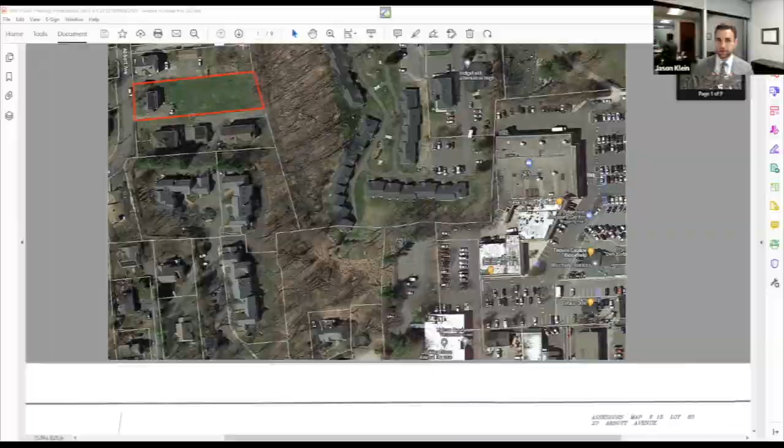So I'm going to stop sharing my screen now and turn things over to Brian.

Good evening. I will be brief tonight, as I said, because we do know that there will be a peer review of the project by not only the town, but interested parties did hire Steve Trinkaus, and we did receive comments through the town today. We got that this morning, so we're digesting it, and we will respond and likely issue an update to that response prior to the next hearing.

Again, just to introduce myself quickly, I'm Brian Carey, I'm the Director of Environmental Services with LandTech. We have offices in Westport, Connecticut. I am a professional wetland scientist and a certified state arborist with over 23 years of experience. Andy Salamides, who is also on the call tonight, is a professional engineer who's working with us to put together the site plans.

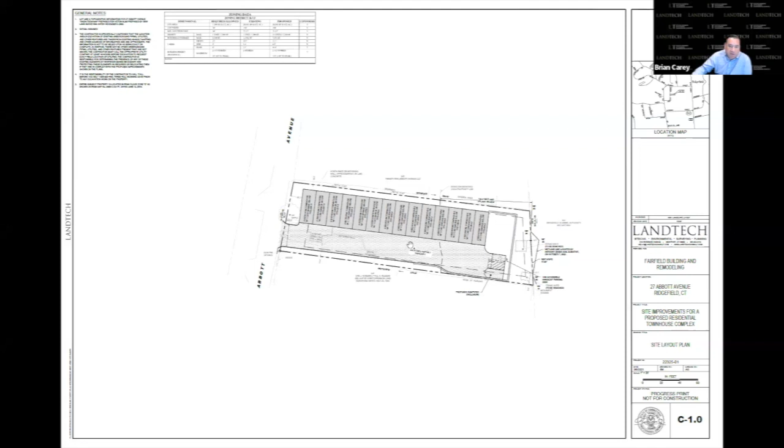This is, as Attorney Klein stated, a proposal for... I'm going to just share my screen real quick if that is okay. Can you see the site plan okay? Can you enlarge it? Let me hold on one second, I was trying to do that.

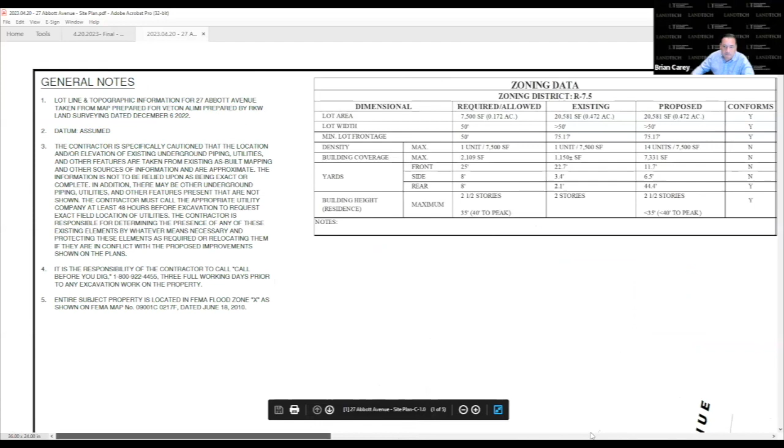Is that okay? Yeah, now you can just center it. That's great. Yeah, thank you.

So the proposal, the property is at 27 Abbott Avenue in Ridgefield. The site is currently 0.47 acres, just under half an acre. It's currently developed with a single residential house that was constructed in 1951.

There was a previously approved application through zoning and wetlands in 2011 for the construction of 3 condominium-type buildings on the rear of the property, which included leaving the existing residential house. I believe that permit is still valid, or is just on the fringe of expiring.

The applicant, who is our client, is proposing to construct the building as shown, which is 14 individual townhouse-style units. It's a 2 1/2-story residential building. The first floor will be garages with a walk-up.

The property slopes pretty gently from west to east. The regulated area on the property is actually just directly off the property. There's a fringe area of wetland that's right on the property boundary, as flagged by our soil scientist, Anthony Zemba, who will be in attendance at future meetings.

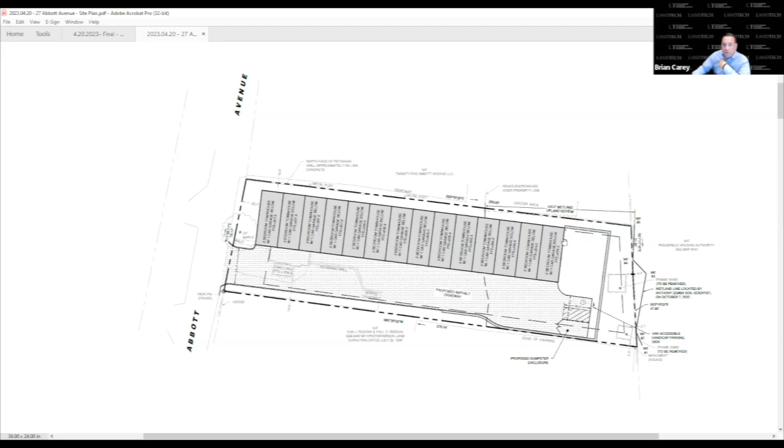We've maintained a pretty substantial buffer to the wetlands. There's a wall that's going in here, but that will all be planted based on the planting plan that we have submitted into the record.

There are no permanent or direct impacts to wetlands. All of the work being proposed as part of this project is taking place within the upland review area, so there's no direct impact to wetlands associated with the project.

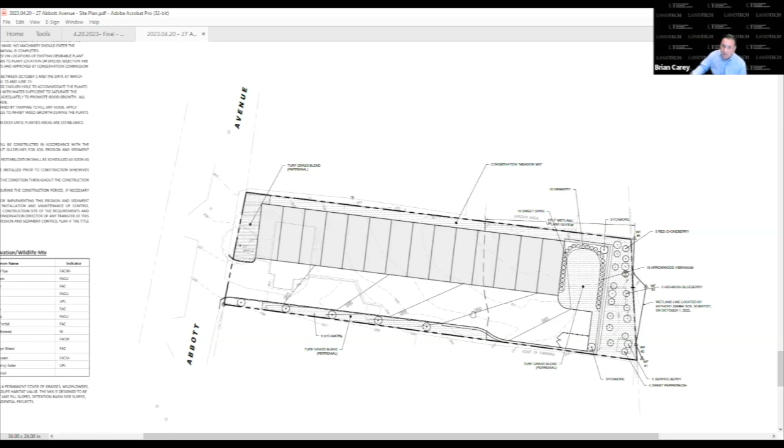We have a pretty substantial erosion and sediment control plan that has been submitted as part of our plans. We did go out there and flag the wetlands as part of this application. That soil report is in the record. Again, there are no wetlands on the property.

There is a small stream course located on town of Ridgefield land, on the housing authority land, just directly off of the property. The site is currently developed, as I said, with a single residential house. The back part of the property is all lawn. There's not much landscape feature to the site itself.

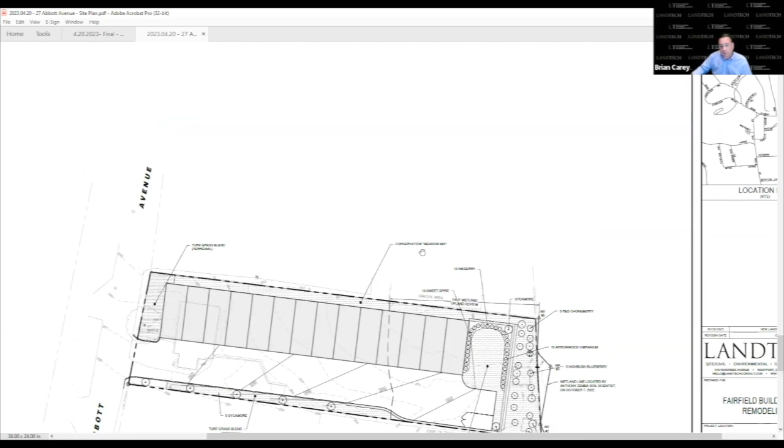As far as best management practices, we are complying with the town of Ridgefield stormwater guidance. The idea is to capture all of the roof runoff and driveway runoff into a Cultec system, and then discharge it via level spreader into what will be a planted buffer adjacent to the wetlands.

Go through this real quick. All of the site is currently serviced and will be serviced with municipal water and sewer. There's no potable well or septic associated with our proposal.

We did submit a wetlands functions and values report as part of our documentation and as part of the record. Basically, the primary functions of the wetlands were determined to be sediment, toxicant, and pathogen retention and nutrient removal, and to a lesser part, flood attenuation, production export, and wildlife habitat.

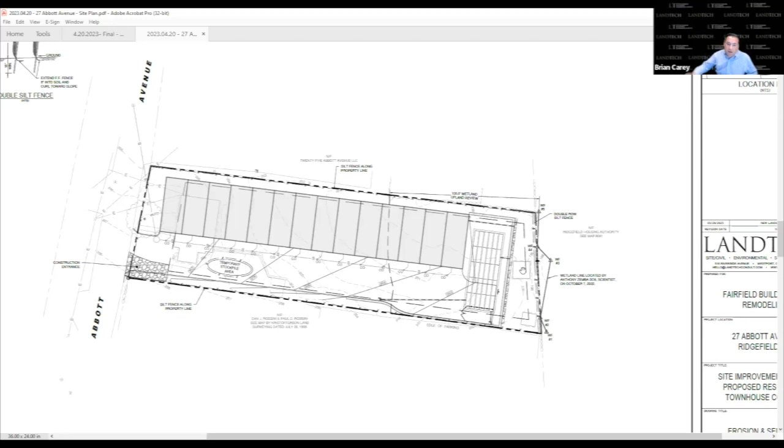Since there are really no impacts to wetlands and we're staying in the upland review area, we do have a planting plan that we put together within the buffer area that we feel is substantial to mitigate any of the impacts within the upland review area.

Associated with our project, again, I was going to keep this short just because of the time frame tonight. We do anticipate getting, like I said, peer review from not only the town, but we do have Steve Trinkaus's memo. We are going to address all of that.

I spoke with Caleb this morning. We will have a response to that within the next week regarding the Trinkaus memo, and then as soon as possible, once we get the third-party review from the staff.

I can answer any questions about the application, but I will be ready to give a more detailed presentation at the next meeting.

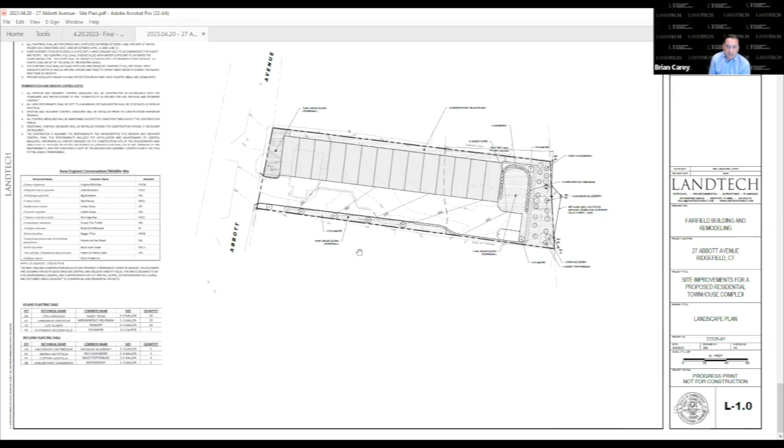Thank you. Any comments from the board at this point? I see Tracy's hand. Okay, Tracy?

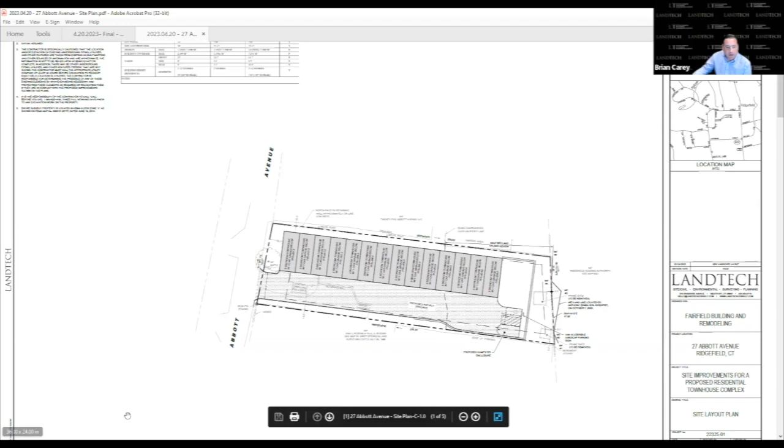Just a quick question. Does your proposal preserve pre-development site hydrology during a 50-year storm? Yes, that is in our water quality report, our drainage manual.

We can have Andy Soumelidis, who's the project engineer, I will have that answer for you at the next meeting. He is on the line right now. That's more of his question that's germane to him. Okay.

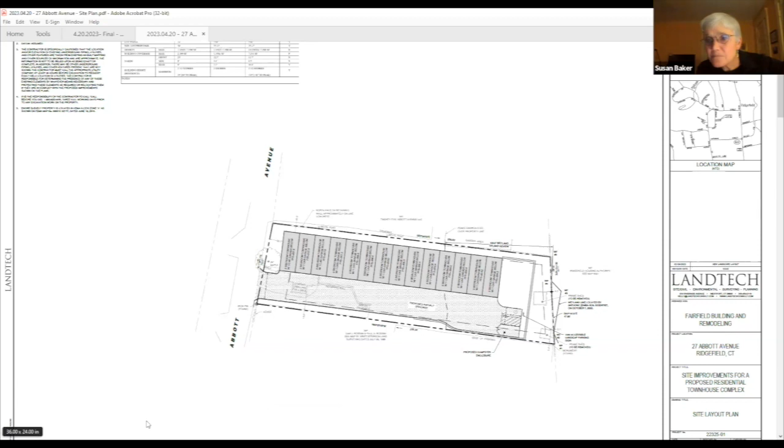Anything else, Tracy? Well, and I guess what is the impervious surface calculation of the proposed plan?

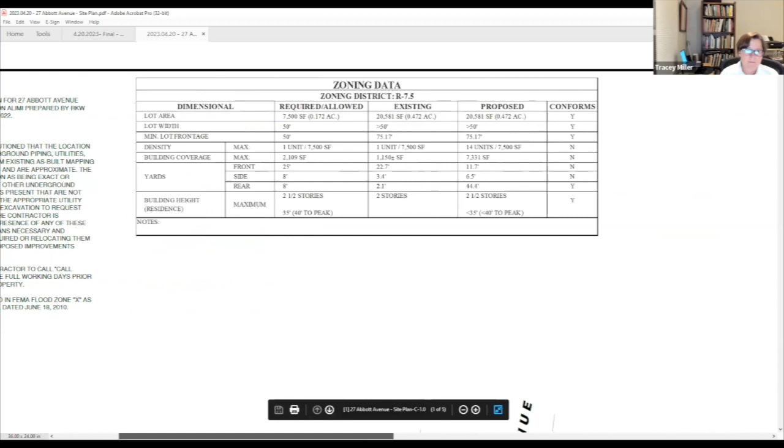I'll have to get that for you. Let me just... thank you.

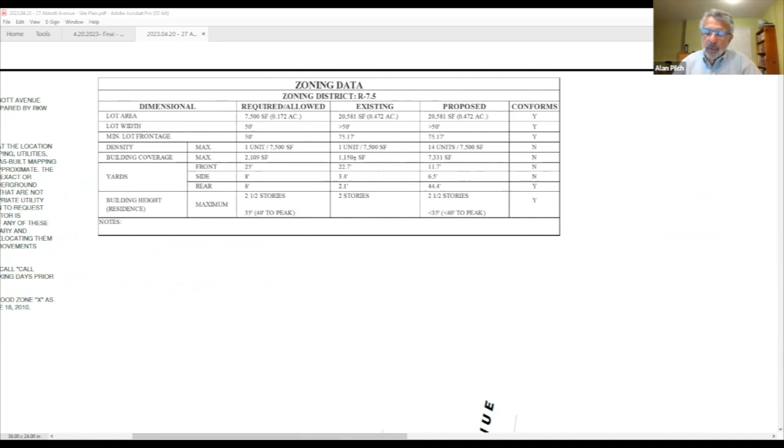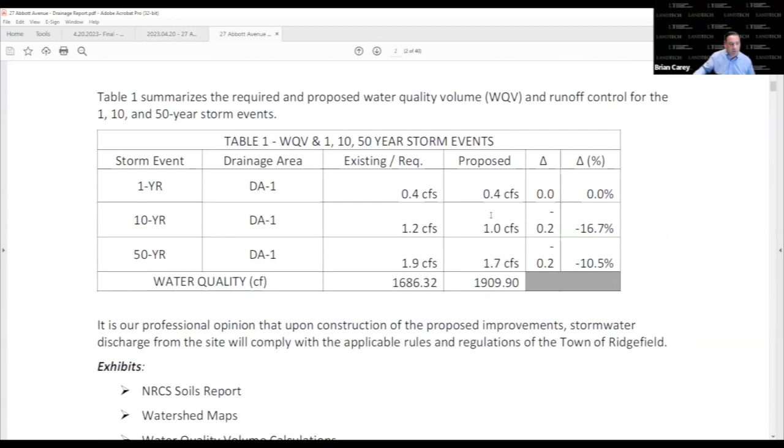Yes, thank you. I just want to first point out, Mr. Carey, that you stated during your brief presentation that roof runoff would go into the subsurface chambers. No, it's going into the level spreader. Correct, it's not modeled that way at all. I just want to point that out. Yes, correct. And I'll just say that I see, in reviewing these plans as well.

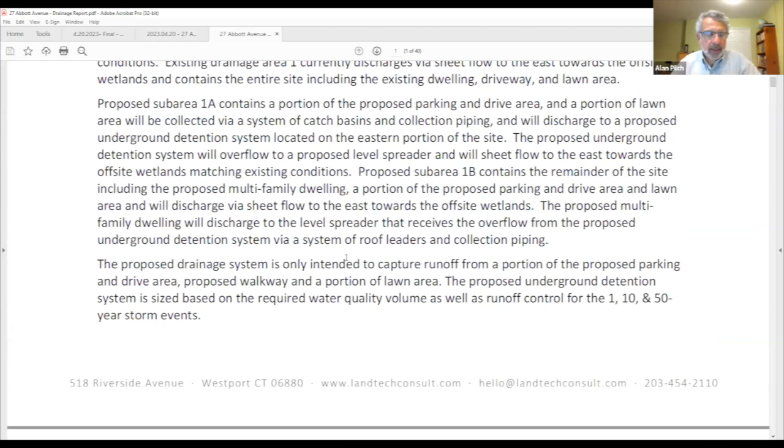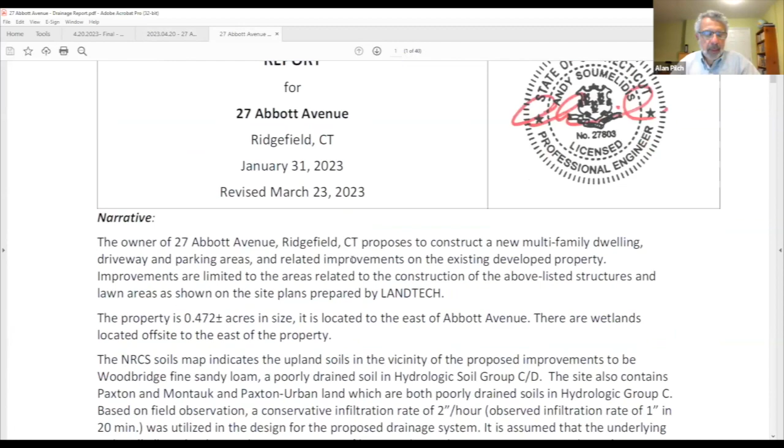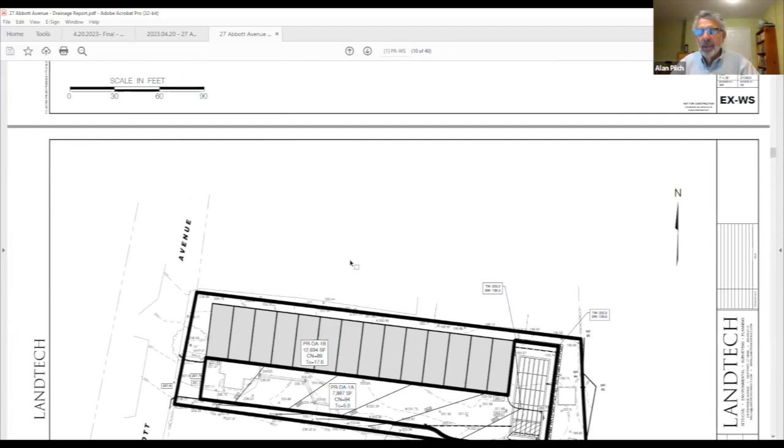I saw that the project narrative presented three alternatives: the no-build alternative, a second larger-build alternative with a larger building, and the third was the current design. But I'll say that this member of the Inland Wetlands Board would certainly like to see an alternative that has no construction, no impervious surfaces within the upland review area. I think that's an alternative that is both prudent and feasible, and I think it is something that should be presented to this board for its consideration.

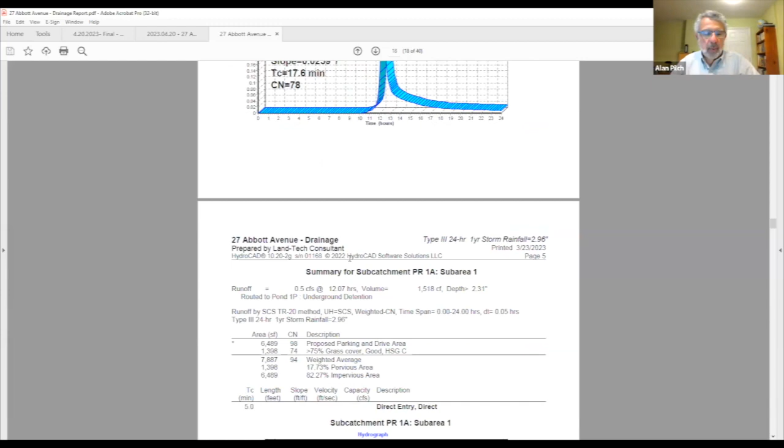I did have the opportunity to review the drainage report, and I'll just say that I am a civil engineer who does a lot of stormwater work. I'm also a landscape architect. One of the concerns I have with the adjacent wetland is that the stormwater management plan as designed will result in flooding and sedimentation into the wetland.

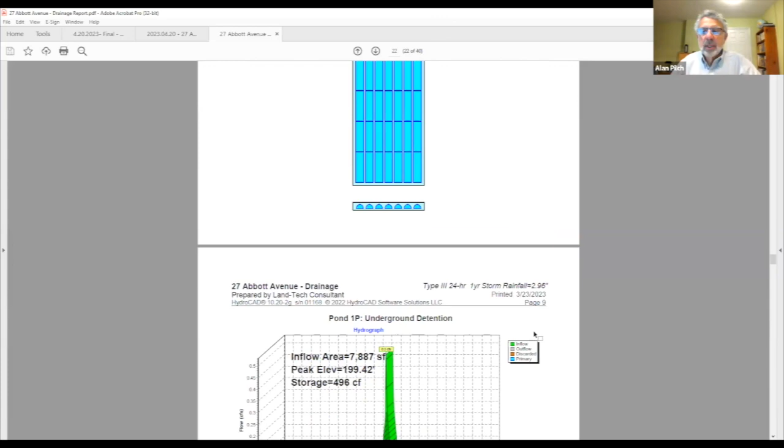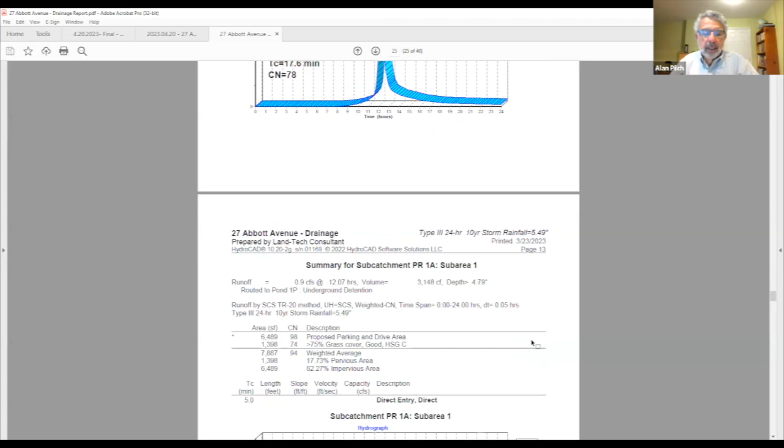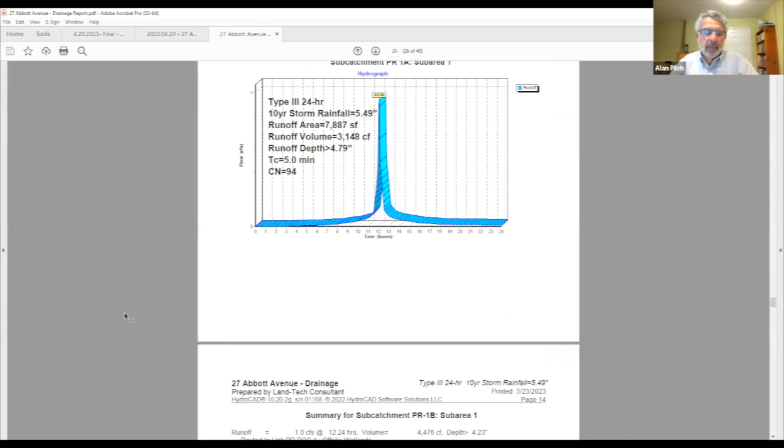I saw that the chambers as designed will not meet the treatment of the water quality volume as required. Looking at the design, I saw the elevation of the stone invert under the chambers and the 6-inch diameter outlet, which is 18 inches higher. That would provide, I'll say, a water quality volume capture and treatment that is much less than the water quality volume required. So it's something that you should rethink and recalculate.

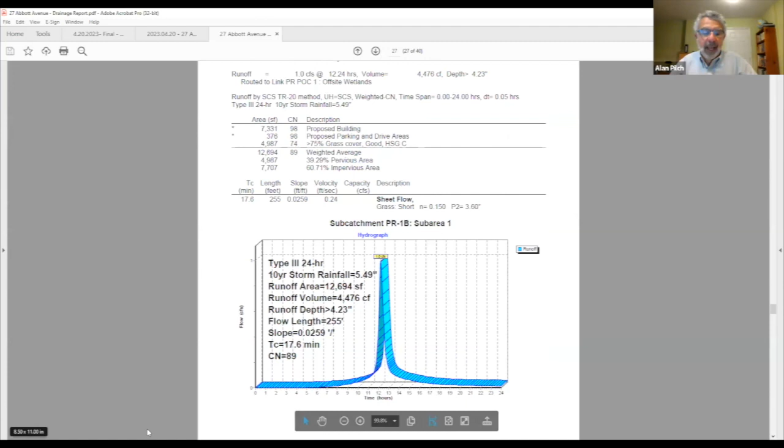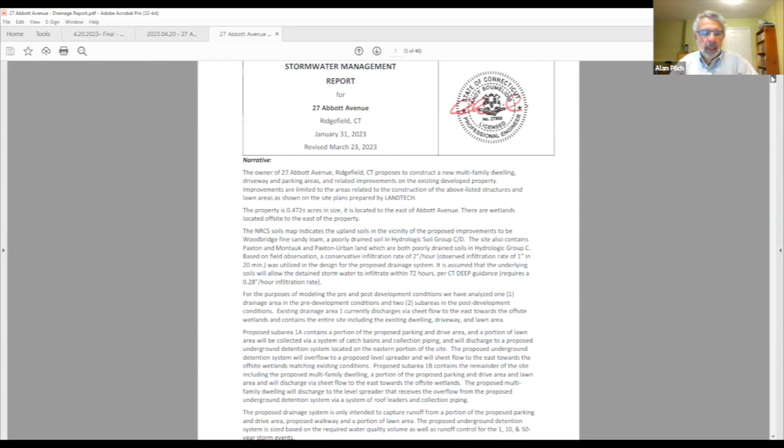I also noted, in reviewing the plans—and I do this professionally myself all the time—that the deep test hole you did within the footprint of the chambers was essentially at elevation 201. It indicated there was water draining into the deep test pit 4 feet, 48 inches below grade, which would place it at 197 feet based on the datum you have.

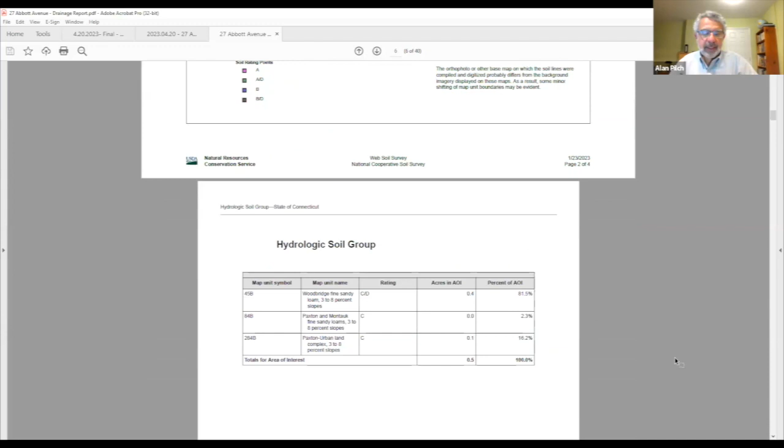And since the stone below the chambers is at 198.7, or only 1.7 feet above the free water seep, I'll just point out that 3 feet of unsaturated soil is the minimum separation required in accordance with the Stormwater Management Design Manual. So the chambers do not even meet that standard.

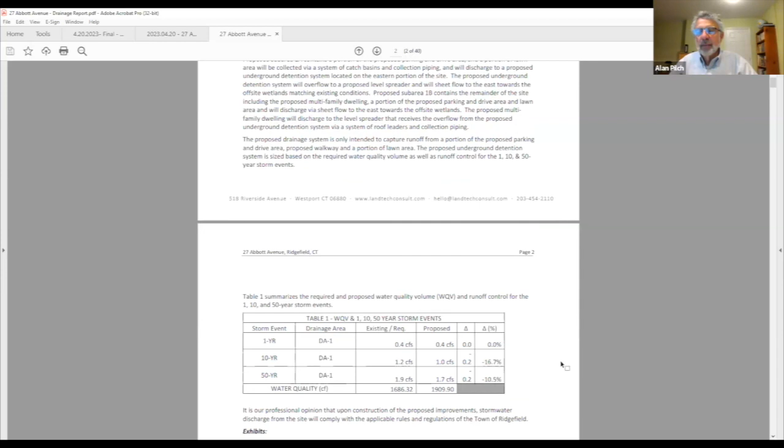And the concern here is that in that instance, you're also counting on infiltration out of the chambers into the groundwater. Typically what occurs when there's not 3 feet of separation is that you get mounding underneath the chambers, and you get none at all—there's no attenuation of the flows. So that is a definite concern on my part as well.

I saw that you used a 2-inch infiltration rate, but not based on soil testing. I looked at the soils present in that location, and that is at the very high end of the rate that these soils show. So I think you should use a much more realistic rate, or do testing based on actual infiltration rates.

I'll also say that one of the drainage areas analyzed, drainage area 1B, I saw the time of concentration used was 17.6 minutes. That is extremely unrealistic and incorrect to use, because that's all the runoff from the roofs of these houses, and that runoff will get to these chambers very quickly. To use the potential time of concentration from these narrow fringes of lawn areas or mown areas to the north and south is, I think, incorrect and unrealistic.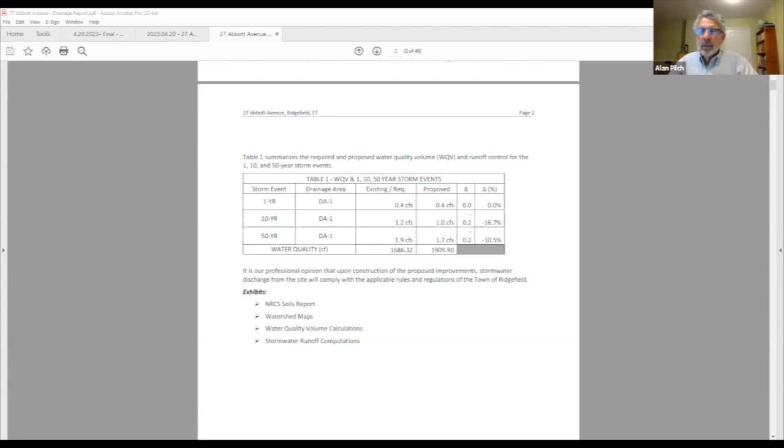Let me also mention one thing. The Connecticut Stormwater Quality Manual also says that the separation between chambers and a building should be a minimum of 25 feet, and that is not provided on the plan. It's much less than that, and that's a sure way to have impacts within the building itself from the stormwater management plan. I wanted to make sure you're aware of these things, which I caught very quickly in reviewing the project.

Thank you, Alan. Anyone? Brian, would you care to respond at this time, or do you want to come back? No, we'll come back. There's going to be a lot more discussion, so it's 9:30. I don't want to keep you guys. You said you had to stop at 10. So I have the comments, and we will address them.

I guess I just have one last -- yes, Tracey. Tracey Miller, I'm a landscape architect, and I'm by no means a drainage engineer.

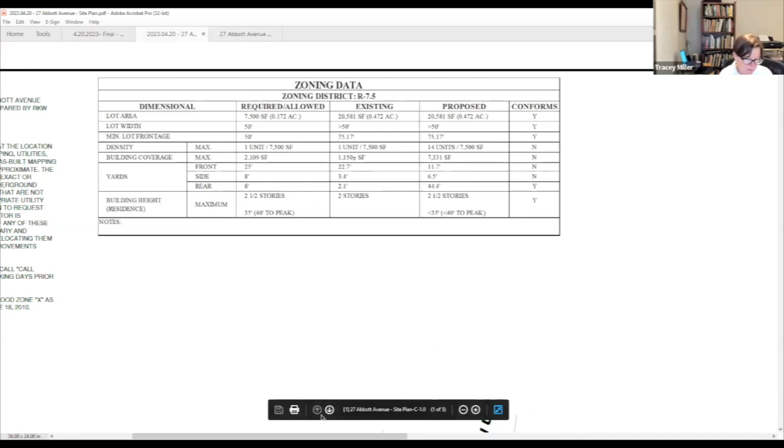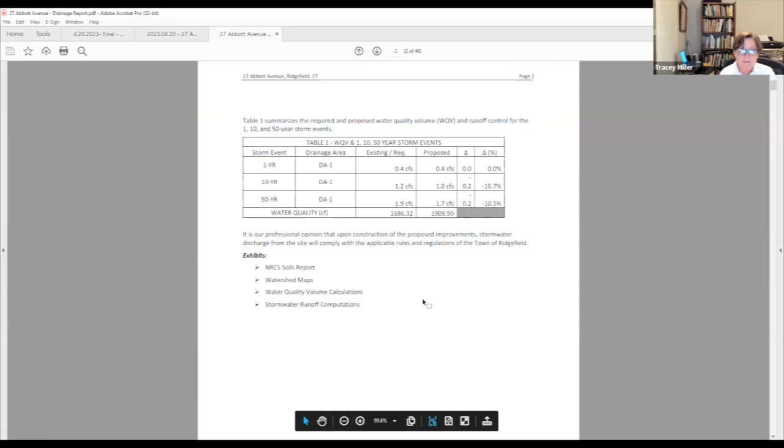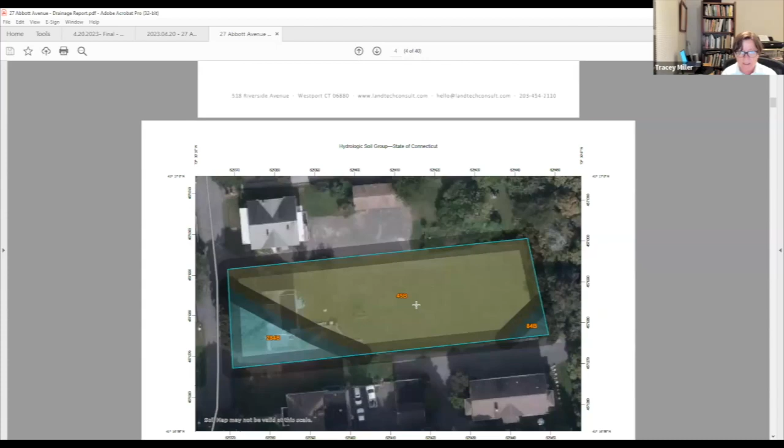But it does appear that the 50-year storm calculations, as a layman, when I add up areas A and B and subtract out the treatment and compare them with the pre-development runoff, if I'm looking at this correctly, it appears you're adding 979 cubic feet compared to existing. When you're over our impervious surface coverage permittable amount, you're required to supply this drainage plan, but it is supposed to meet pre-development standards. So just double check that, make sure I'm not misreading it, but that would be an important point. If I'm correct, that would add up to over 7,000 gallons and 122 bathtubs. I could be wrong, but just double check that.

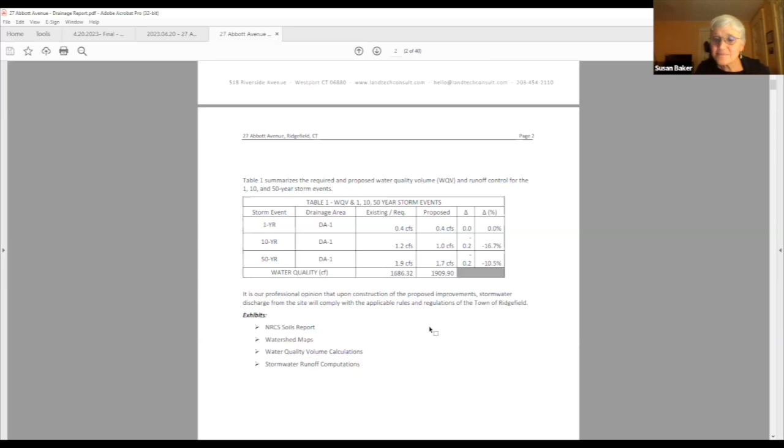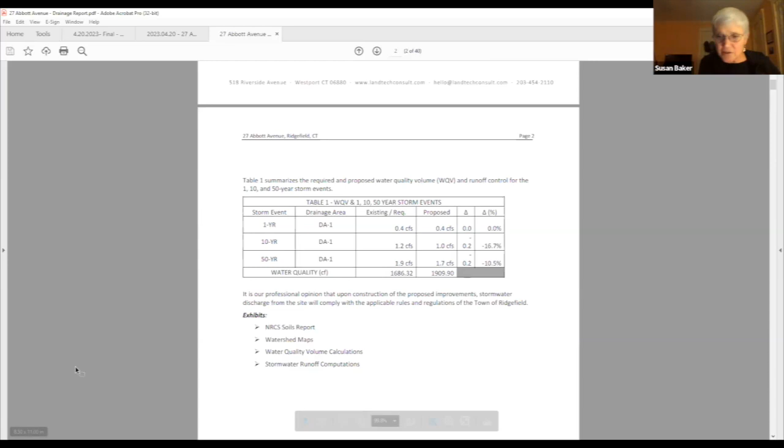Thank you, Tracey. Any other members of the board comments at this time? We'll have more to comment on at the next meeting, obviously. Okay, doesn't appear to be. Fine, then it looks like we have some time to get to some public comments.

I guess since Mr. Trinkus was mentioned, if he is here to speak on behalf of the neighborhood, we could have him comment first, if he's planning on commenting. Yes, thank you. Just had to click the button correctly.

Good evening, Steve Trinkus for the record. I'm a licensed professional engineer in Southbury. I was retained towards the end of last week by the neighbors group to do a peer review of this plan with a focus on stormwater management, because I am aware, having done a lot of work in Ridgefield, of flooding issues along this stream corridor. I submitted a report yesterday and sent Caleb a copy this morning as I realized I had a typo in it. Alan made some very good points, and I'm going to concur with many of them.

Starting on page 2 of my report, percolation tests are not a suitable test for designing stormwater infiltration practices. They measure both horizontal and vertical movement of water, which overestimates the actual infiltration rate. For stormwater management practices that might infiltrate, we only use the vertical infiltration rate, which is only determined by what's called a double ring infiltration test. So right off the bat, that's a major flaw here.